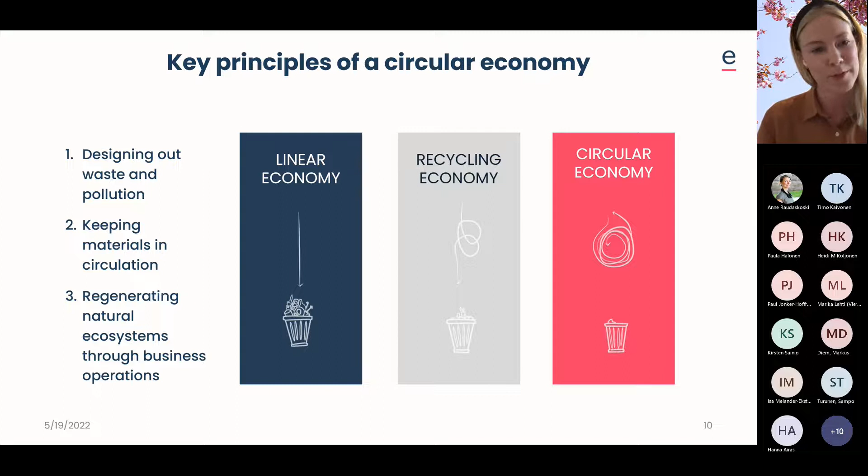I would like to point out that it has been evaluated that all human cities and infrastructure have a mass of over 1,000 gigatons, while trees and shrubs only add up to about 900 gigatons on this planet. So there's really a lot of mass in man-made structures that we have, and a lot of materials.

You have perhaps heard of the term urban mining before, where cities are seen as productive sources of raw materials, in comparison to virgin raw materials. In the near future, they might even be more productive than actual mines for many raw materials.

However, as stated earlier, a main principle of circular economy is maintaining the value of materials as high as possible. So we therefore want to prioritize the reuse of, firstly, entire buildings, secondly, building parts, thirdly, construction products, and so forth. There's a hierarchy in order to preserve the value of materials. Tuuli will tell more about this in a little bit.

As professionals and planners, we really need to design all new constructions with their future disassembly and reuse in mind. Tuuli will now describe some strategies on how to do this.

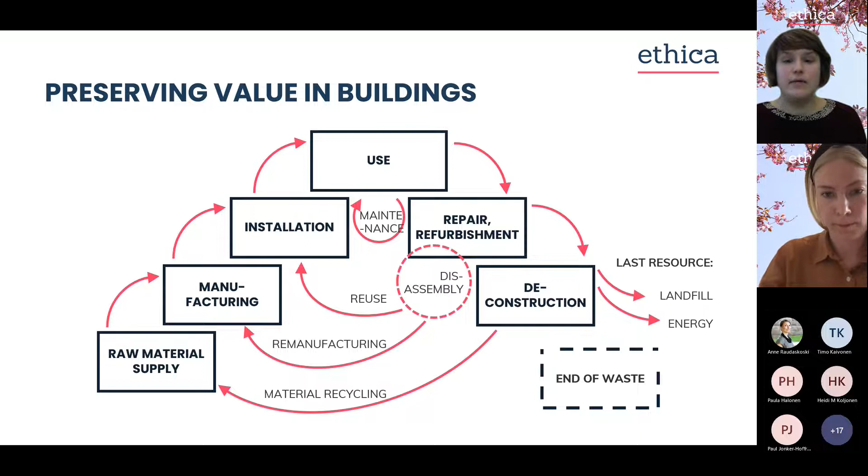While many interesting pilots focus on one or two circularity features, holistically circular buildings are still scarce in Finland. Here is one of our examples, a concept design on how circularity themes can be brought into the design of a building block.

This concept was based on renewables. The block will own a solar farm capable of providing all its inhabitants with the electricity they use, while heating and cooling come mainly from the ground. Apartments were designed from modular parts, combined flexibly into different sized apartment units. Some spaces, vehicles and utensils were provided through a sharing scheme for the inhabitants.

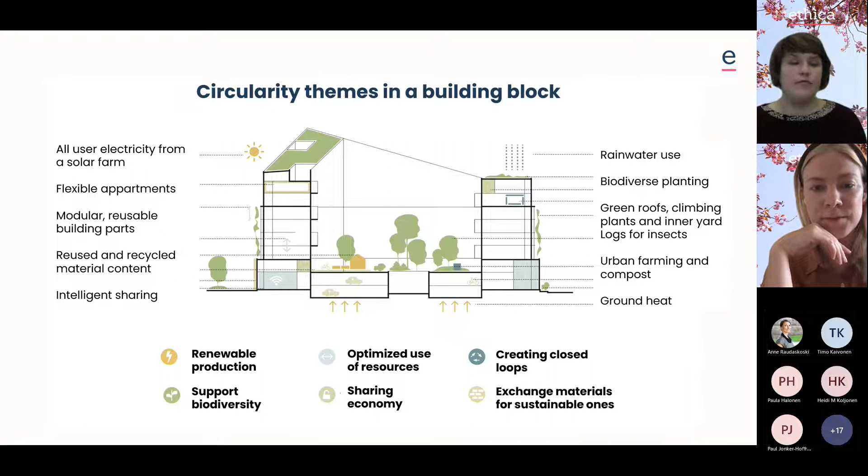We also had a lot of focus on producing food in the block, recycling nutrients through composting, and providing very biodiverse planting to invite non-human participants to live in the block.

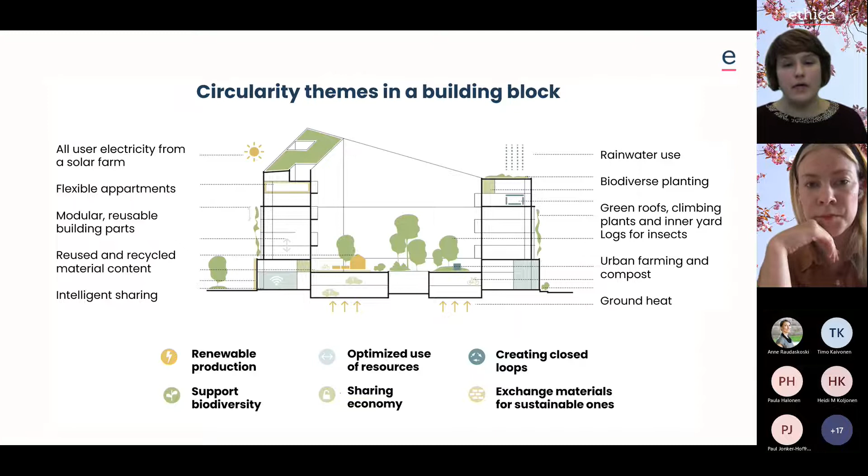In the big picture, it's really about reimagining the way we create our built environment so it can support the well-being of humans and the environment alike. The paradigm shift needs to go through all levels of decision making. It starts from governance, but we need to take action on all levels at the same time, as legislation can be slow to change.

I already mentioned a few examples from our urban planning projects, and now I'll go through a couple of other levels we've been working with. Real estate owners have an important role to play here as well. Many are setting new targets and revising their strategies to support sustainability, but there is still a lot of work to be done to reach net positive buildings and positive impact in the built environment.

One of our clients is the pension fund Varma, who owns over 4 billion euros worth of real estate. It makes a great difference how these buildings are operated and new ones created. We have been working with them from strategy down into guidelines and instructions on how to maintain their buildings, helping them pay attention to what material flows go through their buildings and where effective impacts can be made.

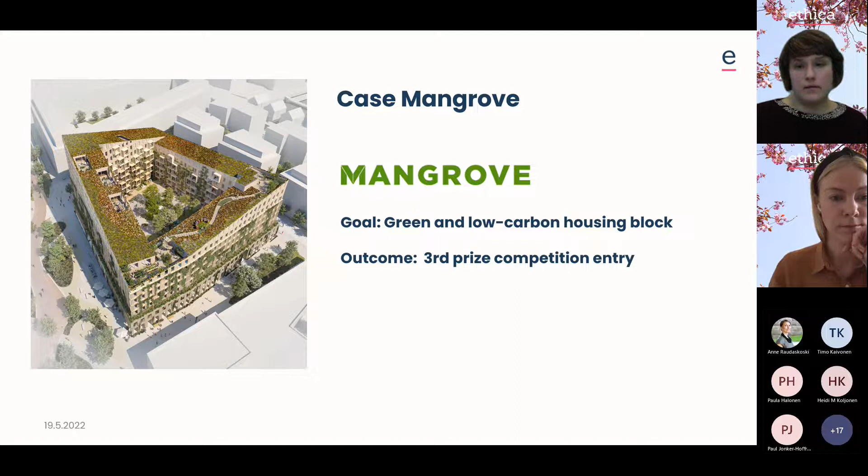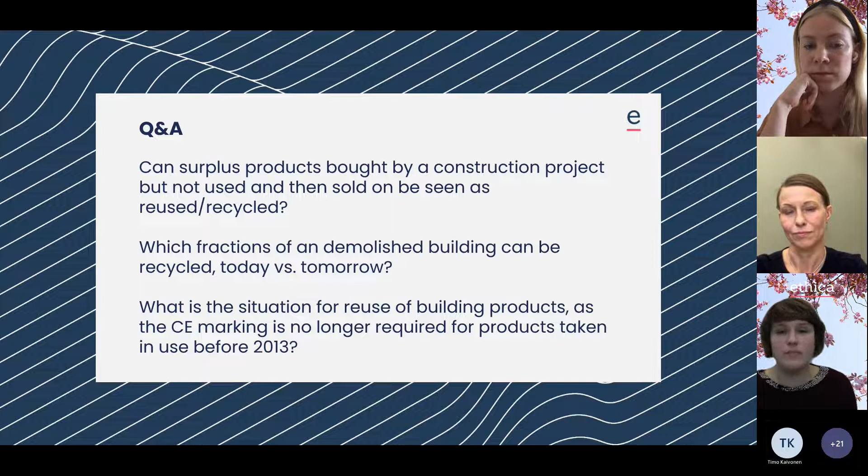And I think here we will hand over to you, Markus.

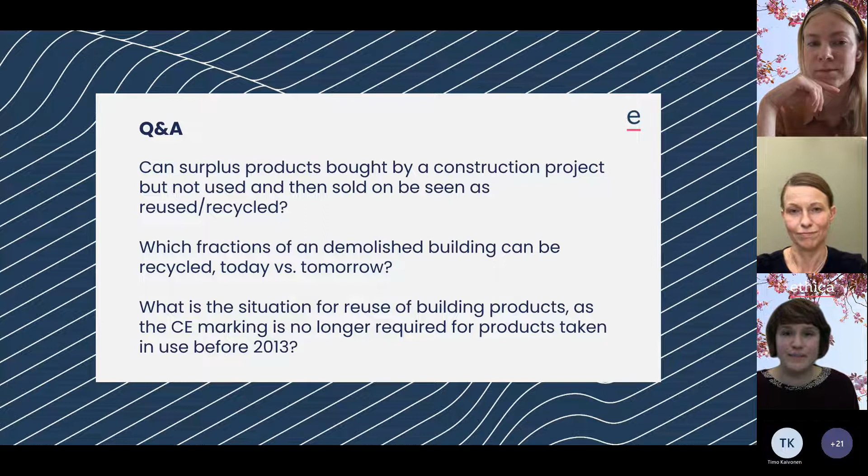All right, thank you very much. I'm not sure if you have my picture now, because I don't see it. At least here we can see it fine. Oh, okay, actually I just encountered a little problem. Our Wi-Fi broke down, so now I'm back. If I'm disappearing in my speech, I'll come back via mobile network. Okay, all right. So thank you very much, and I will start my presentation now.

Yes, perfect. All right. So maybe quickly about myself, who I am. My name is Markus Diem. I'm an architect. I spent most of my career in China, 15 years, where I worked basically as a green building expert.

And in 2019, I returned back to Germany, and then I took over the lead of the office of EPEA in Hamburg. In Hamburg, we have around 40 people right now, so we are the biggest office of EPEA. I will talk about EPEA two more minutes before I start with explaining Cradle to Cradle.

About EPEA: it's quite an older company already, founded in 1987 by Professor Michael Braungart. So basically through all the years, there were different things happening. I hope a lot of you know the book Cradle to Cradle: Remaking the Way We Make Things. Very fantastic book, and I can just recommend you read it.

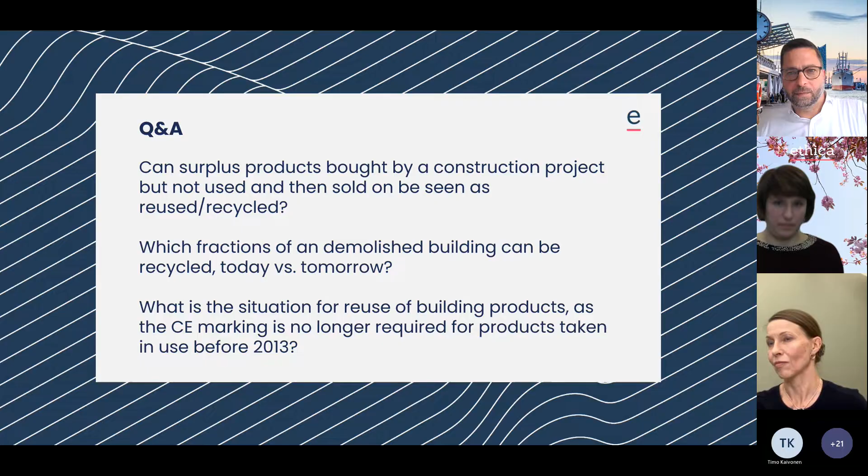Do you see that something is moving now? No, we went back to the question and answers. I am now on the page where you see myself, my photo. Ooh, that's weird. Another thing, let me quickly quit the meeting and come back in, and maybe then it works again. Yeah, okay, thank you.

So I'm back. Good, I read that the audience can see the slides moving. Okay, well then go ahead. I think we're familiar with it. Okay, so if it stops moving, hello dear audience, please let me know. Yes, fantastic, go ahead, thank you.

Okay, so I go back to that slide where I show what happened in the history of EPEA. I just want to say that in 2013, EPEA started the cooperation with Drees & Sommer. And in 2019, Drees & Sommer and EPEA merged with each other. Also important to mention is that since 2020, we have our cooperation with Ethica, very important for us.

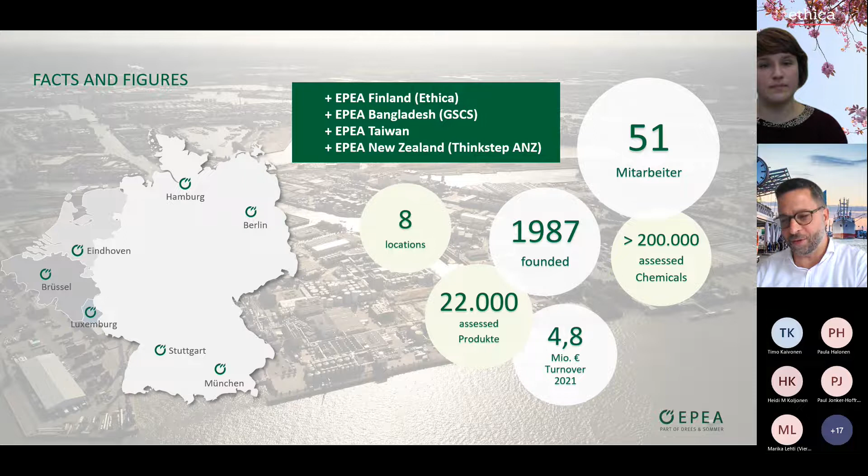In our company, we have a very diverse team, a very broad expertise, because we need that, because Cradle to Cradle works in all industrial sectors. And of course, we have in our work a focus on the real estate industry, which you will also see here. So the real estate is one part of what we do.

And there we work with real estate developers to create healthy and circular buildings, and with the industry to create circular products. And of course, there is an area where both things meet, and these are the construction products. They are produced by the industry and used for real estate projects. So that's a very important topic. And this is also where there's a lot of raw materials basically embedded in the world, and also which encounters later a lot of waste.

So now I would like to explain quickly the Cradle to Cradle framework. That is important for us to understand where we are coming from.

This should show a little bit about how the industry is working today when we produce products. We harvest resources, we design it, we sell it, we use it. This example is an office chair. So mostly an office chair in the end, maybe some parts, what you can see here, is taken back later. So you see that they come back, sometimes different parts can come back.

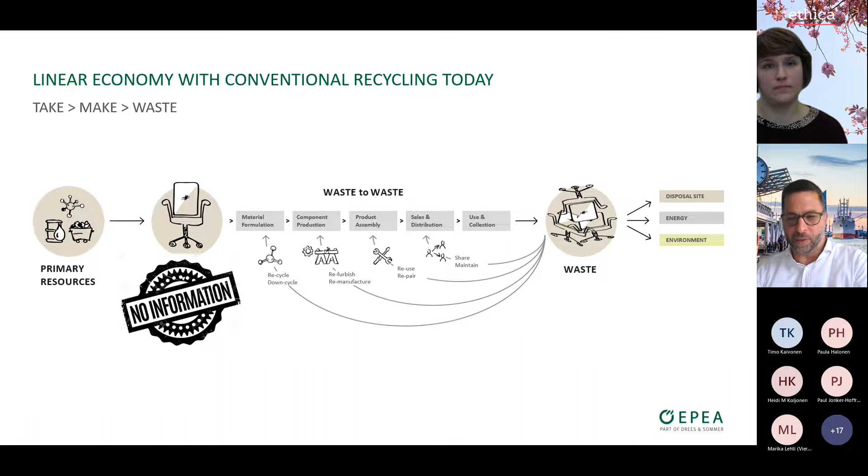So cradle to cradle is a little bit different. And the main idea you see here, basically... okay, so cradle to cradle thinks about two different circles, basically.

We have the biosphere, and the biosphere is for products that dissolve back into nature. This could be, for example, natural fabrics. It could be like cleaning detergents, everything where from our usage, it goes into nature. A cleaning detergent goes into the sewage system through the water after you clean it, for example. And it would be good if the biosphere can dissolve it.

And in the technosphere, we have most materials circling. These are all other materials, plastic, glass, steel, whatever. And this is something that we have to take really good care of, that we reuse these materials.

And in cradle to cradle, this information that I first said is missing is not missing anymore, because these products are assessed. And we are working, when we do an assessment, with the supply chains, so we know what's in the product. And this information is stored as well and documented, so it's also available at the time when this product is not used anymore. And this allows us to bring the goods, the different materials from a product, much better back into a circle. This butterfly is quite famous, because many people saw it already. So this is the basic principle behind Cradle to Cradle.

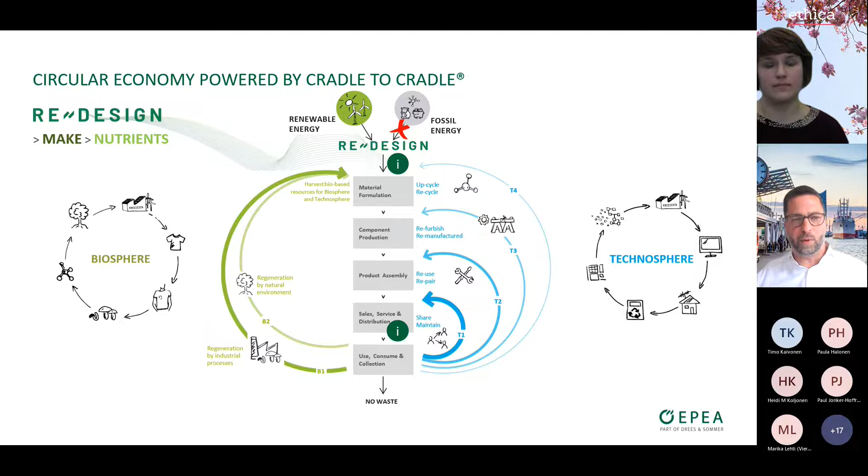And we call this slide 'Cradle to Cradle in a nutshell.' It should just explain quickly the mindset of the framework. We saw this picture already before at the presentation. It looked a little bit different, but it's really mainly about maximizing the positive footprint.

For example, the materials you use to build something are not produced emitting a lot of CO2, and having gray energy inside. It should be carbon neutral products. Here we are always getting more efficient - we put insulation on the building, we use less fossil energy. So it's just reducing the negative impact, but not turning it into a positive impact. This is what Cradle to Cradle is about, and what it wants to reach.

Cradle to Cradle has three different principles. The most important one is: nutrients remain nutrients. Everything is always reused again and becomes a nutrient for the rest. In the background photo of Ethica colleagues, you see the cherry tree, and this is, by Michael Braungart, always the symbol for the circle.

The next one is use of current solar income. I think it's clear - we need to produce everything with green energies, not fossil energies. And Cradle to Cradle is celebrating diversity. This basically stands for wishing to have different solutions, because there are always different solutions, which is good. It's flexible.

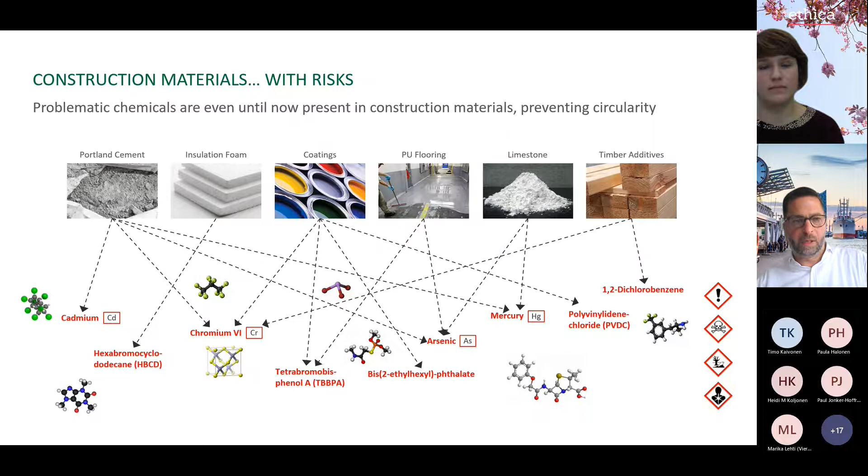A big topic in this case is indoor air quality. We have that problem nowadays because back in history, we had no insulation. We maybe had some harmful materials, but the chance is not as big, because 200 years ago the chemistry was not as complex as today. So today we have highly insulated and sealed building shells, and a lot of different materials that we do not know what's inside.

That's why we often have so-called sick building syndrome, because you have toxic materials and you breathe them in. Some people have allergies, some get headaches. That's not good, we should not allow that. In future, buildings still need to stay highly insulated and sealed because of energy efficiency, but inside should not be toxic materials anymore. It should be healthy materials.

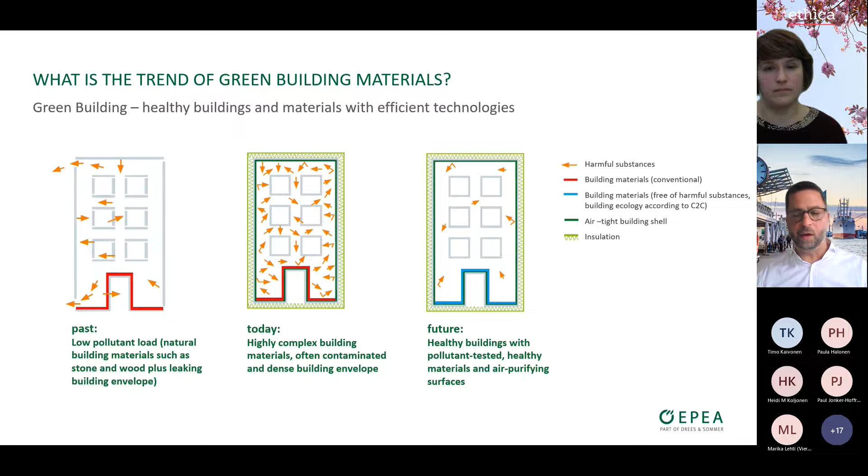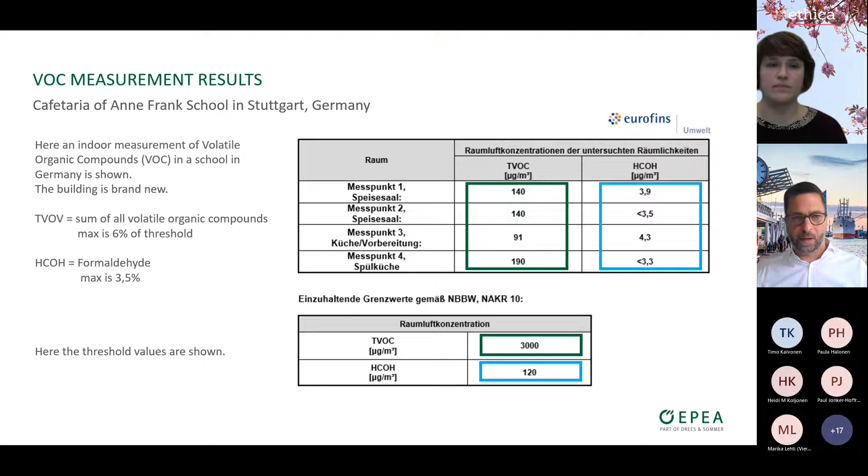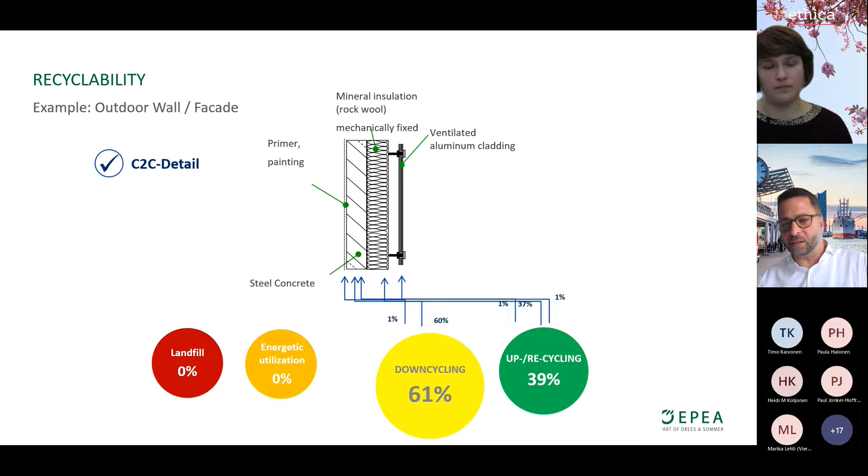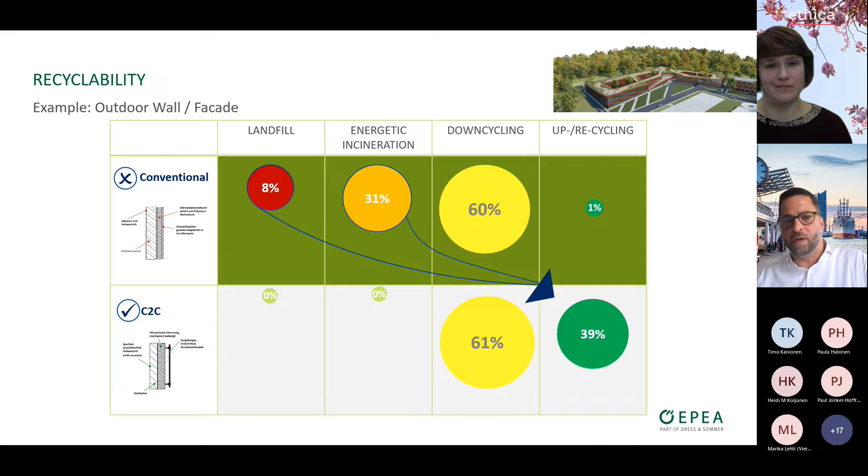If you compare it to a conventional facade nowadays, with all this glue, you have EPS insulation and different layers all glued together. This whole thing later is burned or goes to landfill, or is downcycled, but nearly nothing is upcycled or recycled. With the other detail, you see that this is eliminated. So that's much better than this facade. This is garbage basically, and this is something you can mostly reuse later. This is the direction we need to go.

These are all things according to Cradle to Cradle. We don't like to see this, but it's easy to understand that everything glued together with heat as well, like composite panels, right now there's not really the technology to separate this into raw materials again to recycle it. That's why we don't like that.

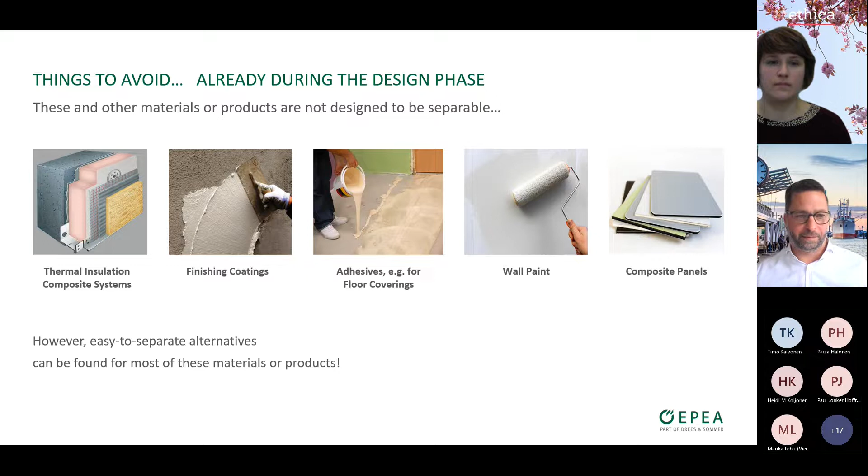Cradle to Cradle engineering, we call it today. It's a discipline, which I will explain in this chapter.

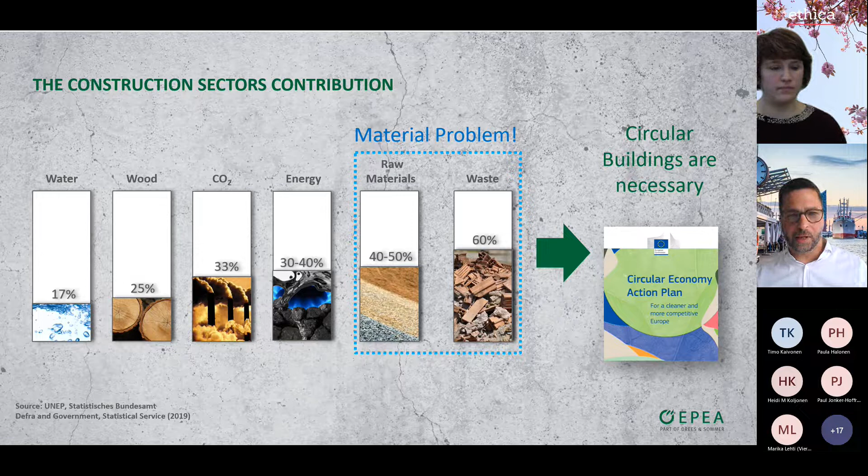Here's the construction sector's contribution to resource usage worldwide, and we can really see we have a raw material issue. The construction sector has about half of the raw materials worldwide and generates 60% of the waste. That's too much. The European Union already realized this, so they're going for a circular economy action plan, parts of which were already mentioned by the speakers before. For example, the EU is working on this right now, and ISO certification is coming up as a framework for Cradle to Cradle design.

So in Germany, we used to have only this energy requirements that you need to have in the beginning of a planning process to get approval from the authorities. But the new government is pushing for a material passport as well, which is a topic I will explain right now.

So the standard building is at the top. The problem is that in old buildings, raw materials are not documented, so there is no value because there is no identity. If you document something, you give it an identity, and then you also have a value of the materials.

So in Cradle to Cradle inspired buildings, as we call it, the raw materials are documented, they are optimized, and they can be reused again. At the end of life, they can be sold - so they bring cash, basically.

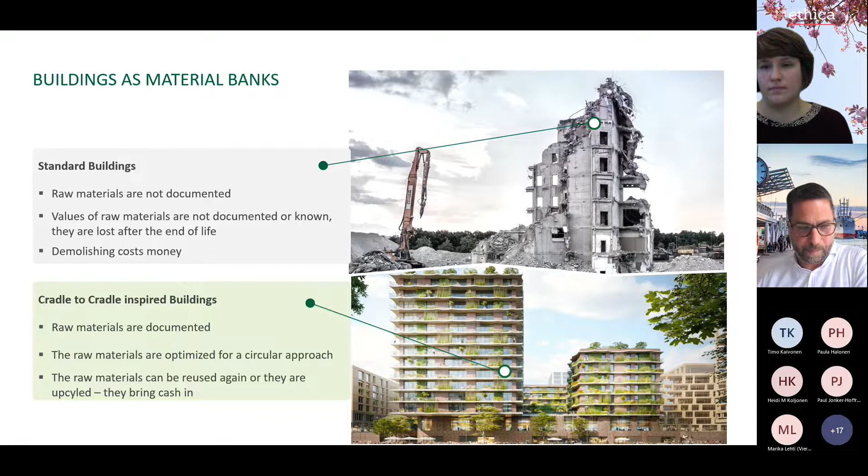So this is a screenshot of a circular design tool that we are using, which we are also developing ourselves. This is a tool we use in the planning phase. You can type in different options - in this case, it's an interior wall. There's a big database behind it, so you can use different materials, like a normal gypsum wall, something with wood, maybe a wood framework, whatever.

And you see different values here - how good is the material, how good can you reuse it, carbon footprint, and also a material value. This can be used by architects, for example, to have real-time planning and to see what impact it has if I change a material in the building.

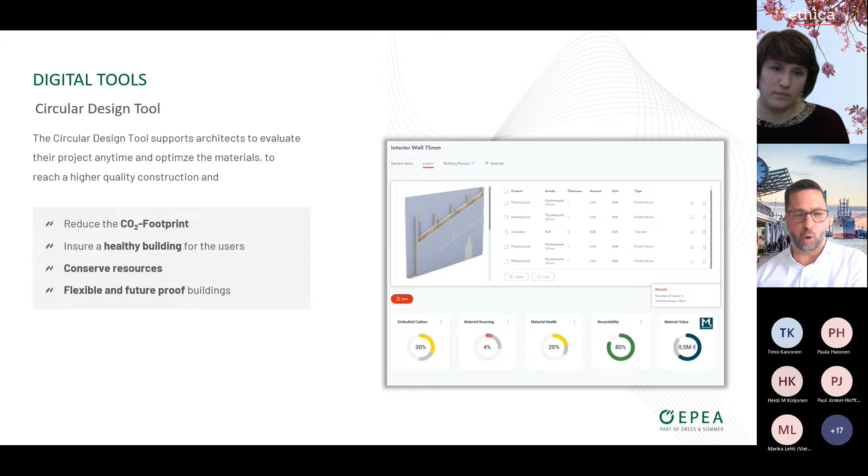And all this later - this is basically where we put our data into our projects. The result of it is our so-called Building Circularity Passport. So everything that we type into the software, that we optimize, that we check out, that we try, is later shown and documented in the Building Circularity Passport.

And we have full transparency here on different aspects, like material health, the carbon footprint, and the origin of the materials as well. This basically means: is it a secondary material that was already used, or is it a sustainable material that comes from sustainable sources, so that it's growing again.

And of course, the stuff that is based on fossils is also included, but it's not good. And then we also check the recyclability - how you can separate it, basically, how you can dismount it. And all this later gives these numbers that you see here.

This is basically the overview page, and every chapter has its own page where you see the results. And again, the results come from what you type into the circular design tool.

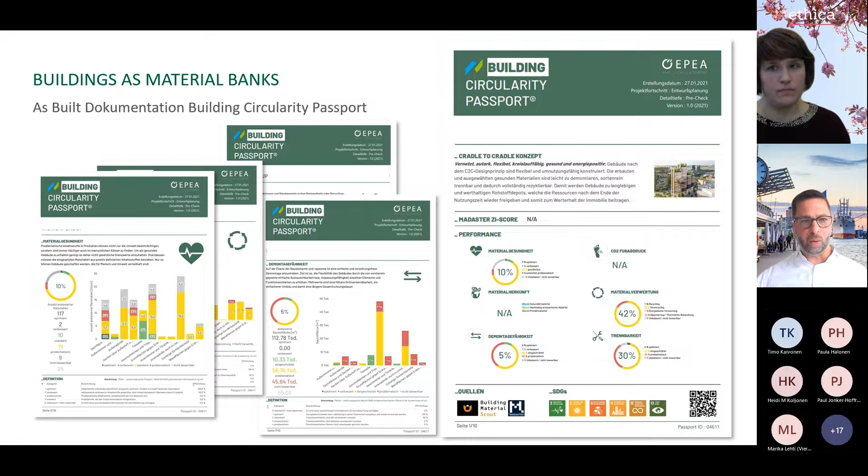So it's important to mention Madaster. I don't know if Madaster is already in Finland. Madaster is an online platform where all information about the materials used in buildings is stored, and importantly, it's accessible for everyone.

So I'll go to the next slide. Basically, if we use our Building Circularity Passport, all this information from that passport can be stored in Madaster. With this, it's still owned by the property owner, but he or she can make it accessible for different people.

You just need to think that maybe in 100 years, when the economy is very different and construction projects are very different, we will check on such a platform: 'All right, I'm planning a new factory, I need these steel beams, I need that.' And then I can check in which older project a steel beam matching my requirements is becoming available. This is how this whole process of reusing building construction materials should be heavily supported.

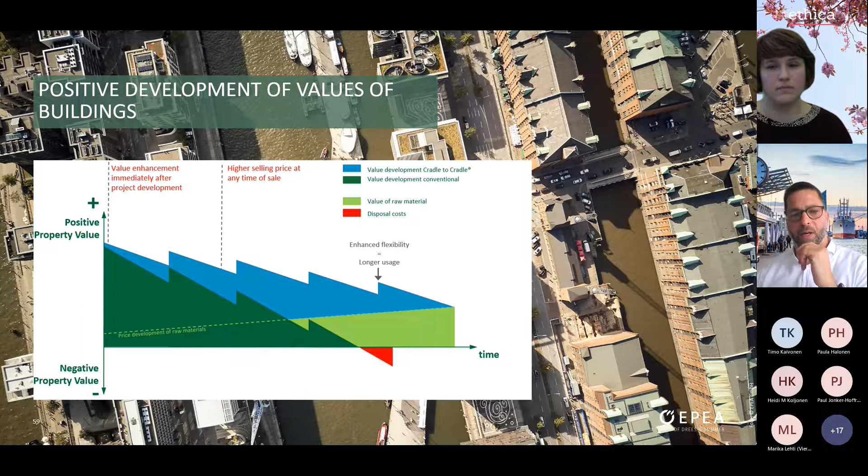Because there's a lot of unknown materials, it's a lot of effort, so you even pay a price to demolish it. But with the background that you document the raw materials, and the assumption that raw materials over the years increase in value and price - think about copper, all the charging stations in cities nowadays, copper is getting less and less, so we think the price might rise - in the end, because you have it documented, you can sell it, so you are paid for the demolishing. That's the big difference, basically.

In the beginning, I called that chapter basically cradle-to-cradle engineering, circular engineering. This is what our people working at EPEA in the real estate team do: they check that products are healthy, and everything which is healthy can be recycled basically. Then you need to work with planners so that the construction details are made in a way...

I'm always trying to compare it with a construction company working for exhibitions - they raise up a booth and after one week they have to demolish it again, so they think from the beginning on, how can I dismount everything and reuse it? This is the way that architects in the future need to construct buildings: no glue, everything thought of in elements, and how can you separate the elements so that you can reuse the materials.

And of course, if you have a flexible building, you can use the civil structure, for example, much longer. I have seen quite a lot of buildings in China, especially where they transformed shopping malls into offices or whatever, because they thought a little bit more flexible.

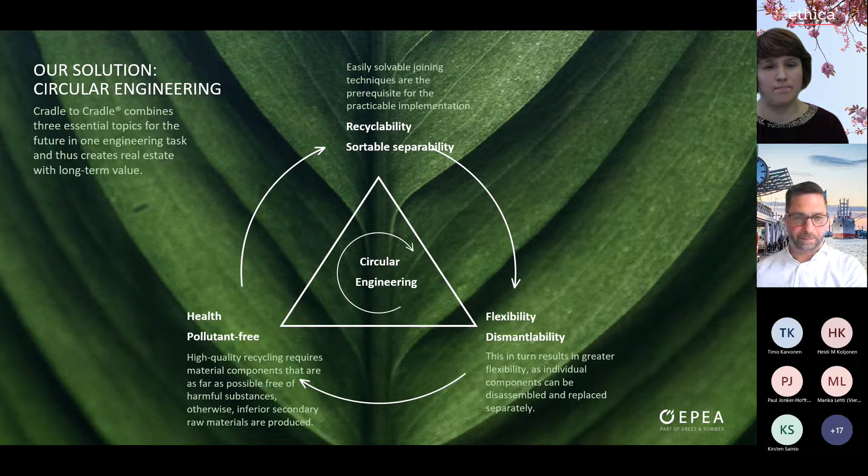The last chapter is called references, but actually it's just a few things - also Drees & Sommer built a new headquarter campus in Stuttgart, and that's a new building. This is also where my colleagues from EPEA in Stuttgart are sitting. And of course, for this building, we try to be as circular as we can, and I'll just show a few things that we did. This is also a look into the planning phase.

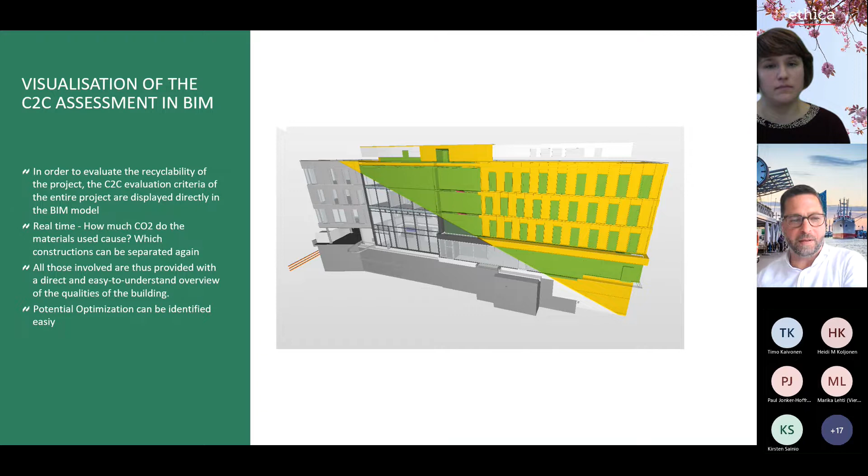Again, this is our tool where we can see - in this case, we show right now how much CO2 is in these elements that you see. Red would be, for example, a lot of CO2 and gray energy, so you can optimize it in the process. And this is basically now photos of the construction phase.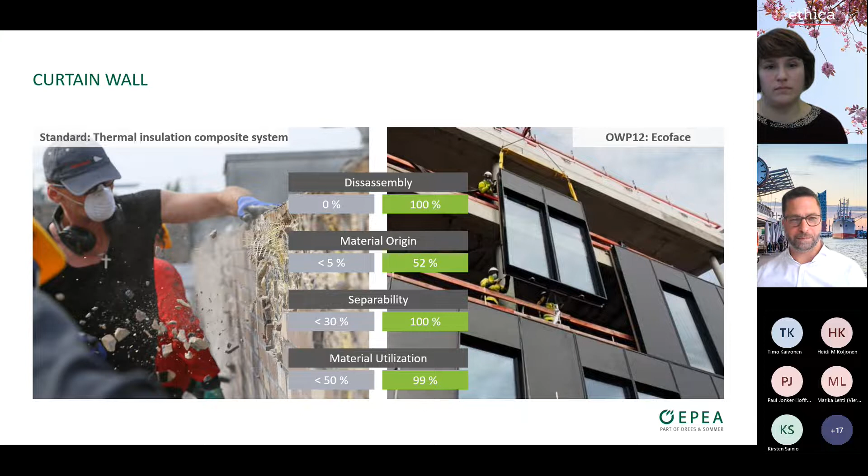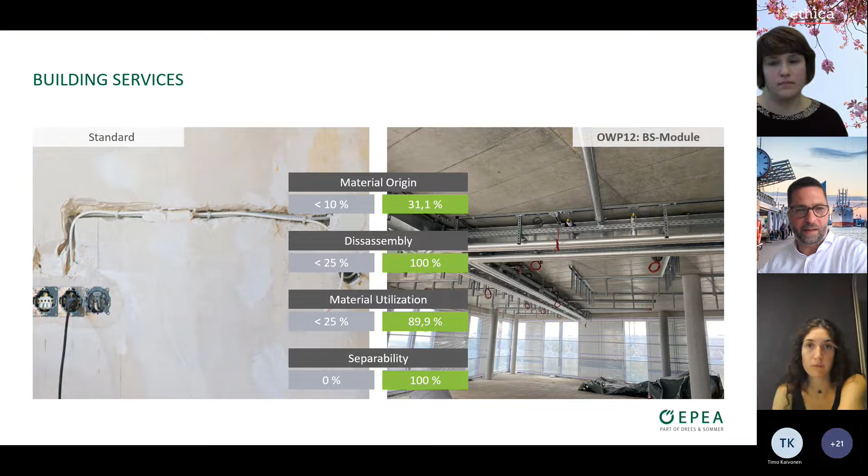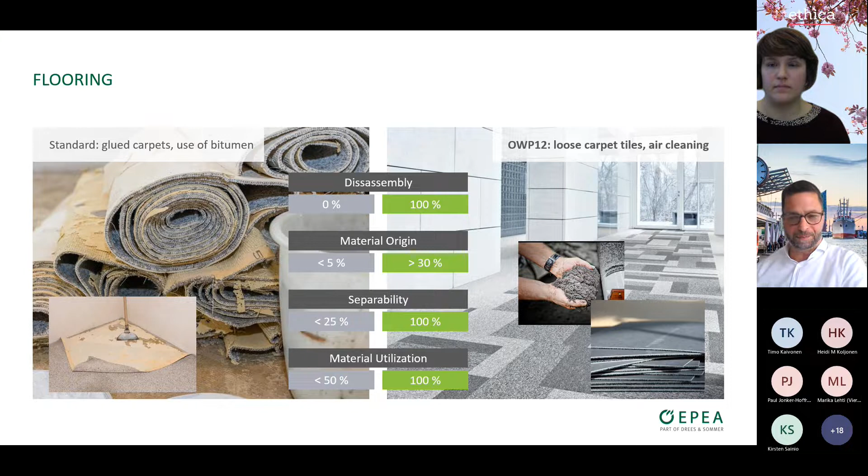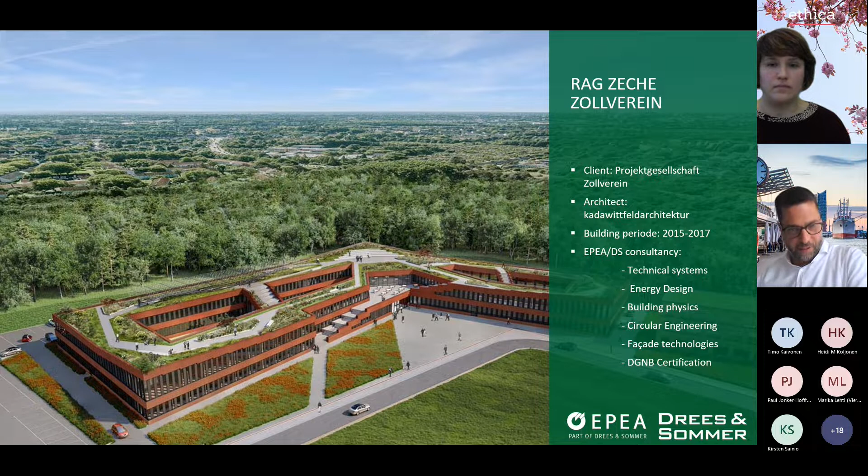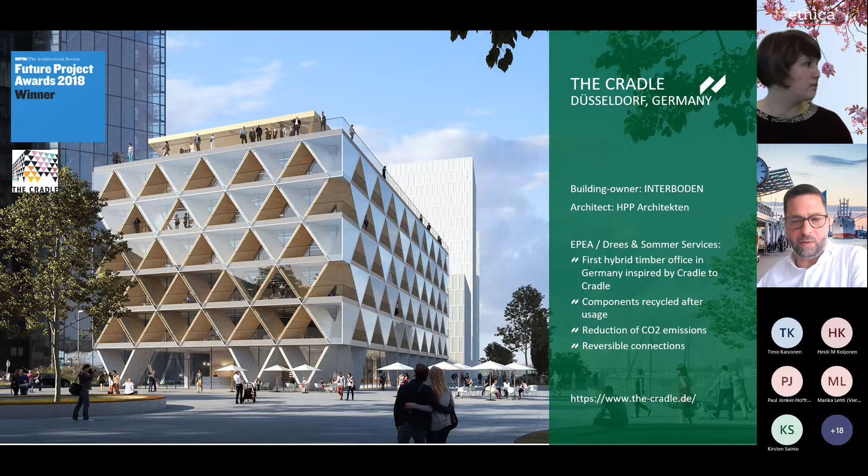I think there will be new photos soon coming up on our social media. We have a short final film showing different players involved in that project and what they think about Cradle to Cradle and why they are pursuing it. The language is German with English subtitles. I'll show that now, it's about 3 minutes, and then I'm done with my presentation.